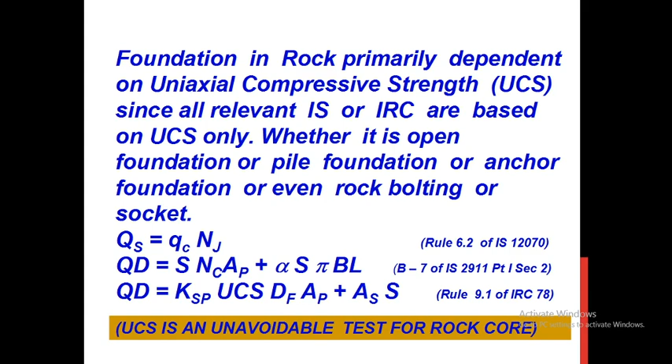So ultimately shear strength S or qc is directly UCS, and this S is a derivative of UCS. Normally it is half of the UCS value. It appears that the UCS value is the most important parameter in foundation analysis in case of rock bed.

However, we are not always getting an appropriate rock core. Appropriate rock core means, for UCS analysis, our test specimen requires a length of twice the diameter.

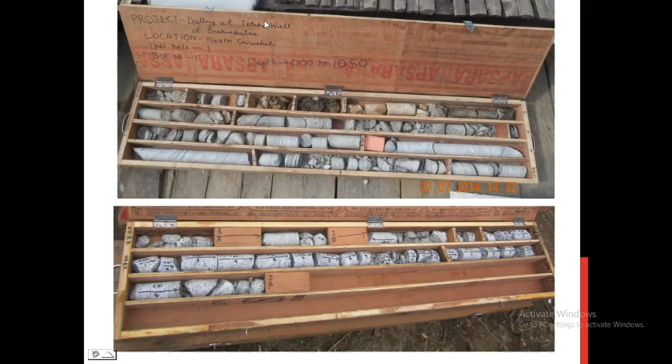Next, in this bore, this is also a 20 meter bore. Here 1 piece is there. Say we can go for 2 pieces here, and 1 piece here. We are getting 3 pieces only. That means in a 20 meter bore we can go for 1 set of UCS test.

People always suggest the larger the core diameter, the better for efficiency and purposeful results, but I do not agree. The hole size should be NX so that we can be within the framework of RQD and our UCS criteria fulfillment. Because if it is a 55 mm core, the required length is 11 cm, slightly more than the RQD requirement. So it is always better to go for NX core drilling for all practical purposes.

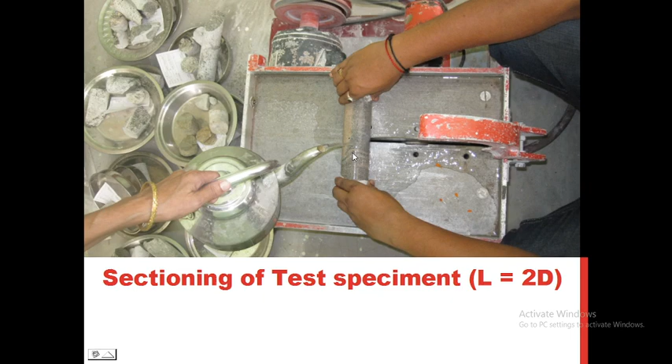You see, these NX size cores with sectioning of the test specimen. The test specimen is L equal to 2D. It should be specimen, not speciment; it was wrongly typed. Length equal to twice diameter. So it is required to be sectioned properly using a diamond core cutter. And next step, we have to polish it for a uniform level base. If it is non-uniform, strength will be misleading, so it should be polished properly.

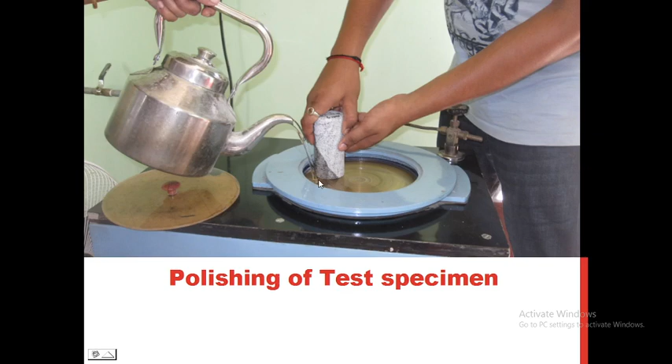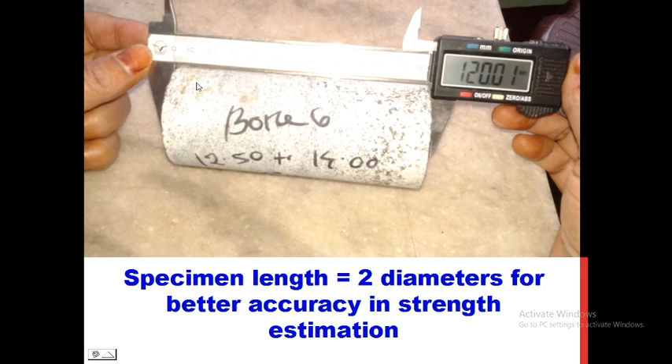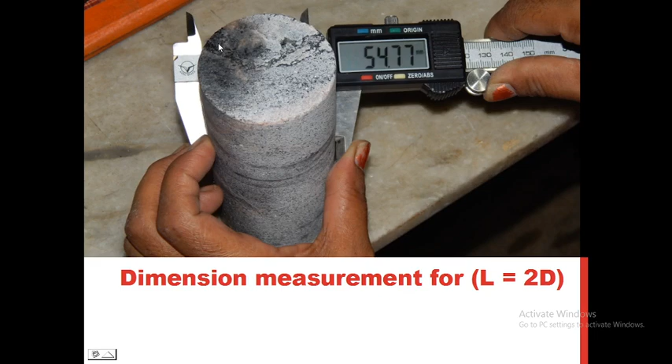Then after polishing, we should measure the length and diameter, because our requirement is 2D. It is 12 cm. Now after polishing, it should be almost 11 cm. A little bit here and a little bit here is removed during polishing, so it will come to 11 cm. Next you see, it is 54.77. Instead of 54.77, we are considering it as 55. New bits give a little less than 55 mm, and old bits give a little more than 55. The average is 55. It is NX size. So we are confirming the diameter is 55 mm and length is 11 cm.

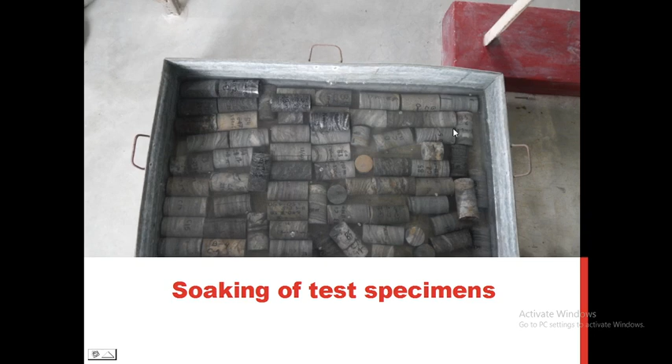Next step, the test specimen should be soaked in a water bath for 72 hours. There are two purposes. Number one, dust or dirt from the drilling operation, the cutting spoils, may remain inside some pores. To remove that, we have to soak underwater for 72 hours and later dry completely, as far as possible to zero moisture content, before analysis.

Though we are fixing dial gauges, as soon as it cracks, all the dial gauges are damaged. And arithmetically, we cannot calculate the actual failure diameter. Up to a very limited scope, say 0.1 millimeter or 0.01 millimeter, we can measure. After that, there is no scope at all. All of a sudden cracks develop, and we cannot measure the ultimate failure length, so we cannot arithmetically calculate the failure area. Therefore, it is considered as load per original area, the initial area. This is uniaxial compressive strength.

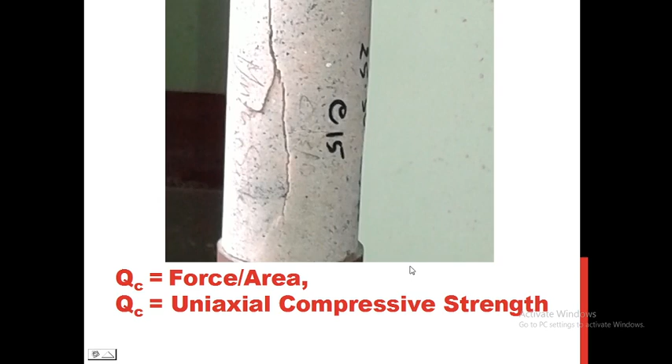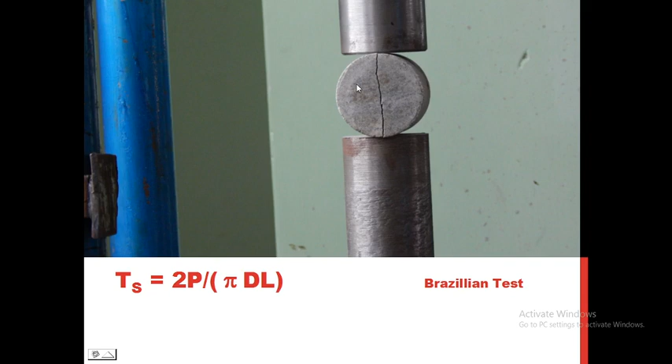In this method there is no restriction on diameter and length. Any diameter, any length, we can use as a test specimen. Here we are using L equal to D. D is 55 mm, L is 55 mm, and this is 2P, P being the applied load, divided by pi times diameter times L. So with this equation we can calculate the tensile strength using the Brazilian method.

Now another easy and most conventional test is specific gravity. In specific gravity you cannot use a big size of core, because the permeability of rock is so low that water cannot penetrate inside to ooze out the air from the voids. There are little amounts of voids there, but those voids cannot ooze out. With about a 55 mm diameter core, it will be very difficult to drain out that amount of voids using water.

So what is the general practice? To crush down the rock core into small pieces so that it can be saturated within a reasonable time. Normally 48 hours is sufficient. In some cases, the harder the rock, the more time it will require, but not more than 72 hours is required to drain out the pore water from the rock core. After that, specific gravity is the ratio of the weight of solid to the weight of an equal volume of water. It is Archimedes' principle. We determine the specific gravity from the equation.

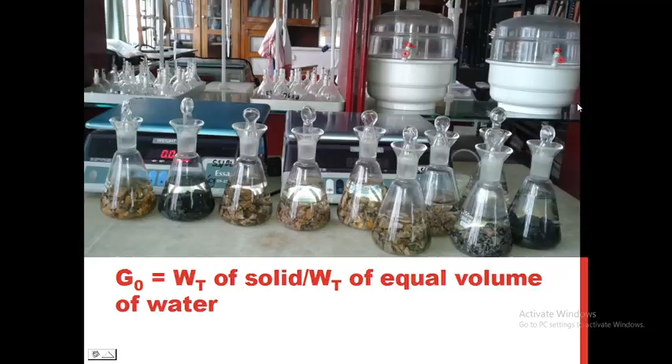We have conducted a comparative study based on several thousand laboratory test results: UCS, tensile strength, density, water absorption, void ratio, etc. From earlier records also, we have calculated about thousands of test results, and we conducted this study with Ms Pinki Gogoi and Ms Neekhat Begum, who were MTech students of Cotton University. They conducted this study, and we were successfully able to draw conclusions on approximate equivalence and relationships between UCS and other test parameters.

In this context, I am sincerely thankful to Ms Pinki and Ms Neekhat for their dedicated services, which may be useful for our next generation.

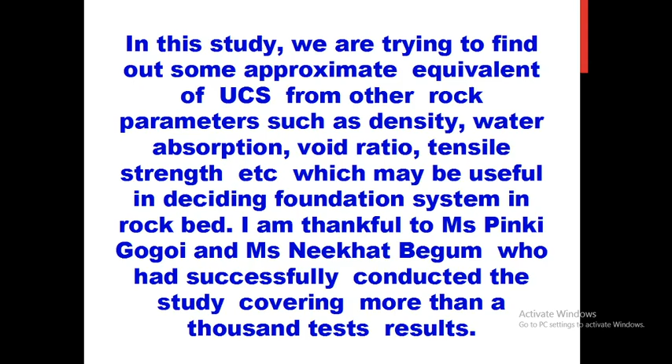You see, this is unconfined compressive strength versus tensile strength. UCS, unconfined compressive strength, versus tensile strength. The equation is tensile strength equals 0.089 UCS minus 1.465. With this equation, if we get the tensile strength, we can calculate UCS accordingly, and if we get the compressive strength, we can calculate the tensile strength.

This graph will be helpful for determining the engineering properties. When there are insufficient cores for UCS and only small cores are available, from small cores we can determine the tensile strength, and accordingly we can get the unconfined compressive strength also. With a rearrangement of this equation, we can go from tensile strength to UCS.

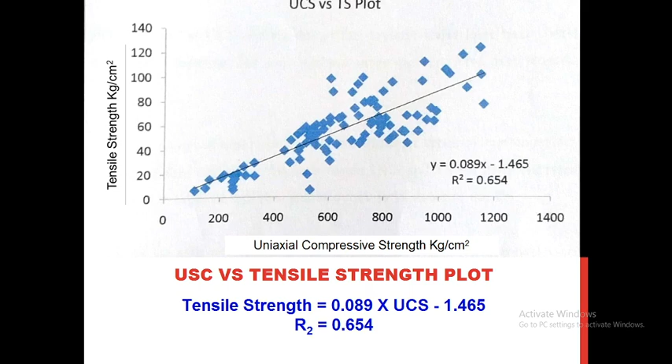See, this is specific gravity. Conducting specific gravity is very simple. This is the simplest test of rock mechanics. In rock engineering, the only simplest tests are density and specific gravity. So with the help of specific gravity, we can also determine the unconfined compressive strength, that is UCS, uniaxial compressive strength.

I have some mistakes because actually I belong to long back. In our days we used foot and inch. Now it is Newton and millimeter. So the old terms are still on my lips.

So, uniaxial compressive strength versus specific gravity. I am not saying that it is 100% accurate. It is 34% accurate, you can say 35% accurate. But at least we can go for specific gravity, a very simple method, and we can calculate the UCS from specific gravity more or less, purposefully. I am not saying that it is exact, but purposefully.

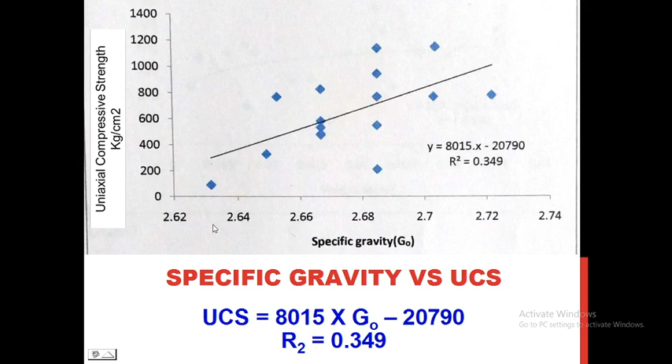I want to add here, in the same formation there are three pieces. We are required to conduct three tests for one set. In my whole career, I never got all three pieces giving the same results, with the same effort, same sincerity, same precision, using the same instrument. I have conducted several thousand tests on rock samples, yet never have three samples given the same value. There is some amount of error, whether human error or formation error. There may be many things beyond our expectation and beyond our capabilities. So, using specific gravity also, we can calculate the UCS values.

Now you see void ratio. Normally the void ratio of rock mass is hardly 0.01 to maximum 1% to maximum 3%, normal range. Normal, which we call sound rock, it is 0.1% to 3% void ratio, normal range. So from void ratio also we can calculate the UCS values. If it is not for design purpose, but for checking purpose, it is purposeful.

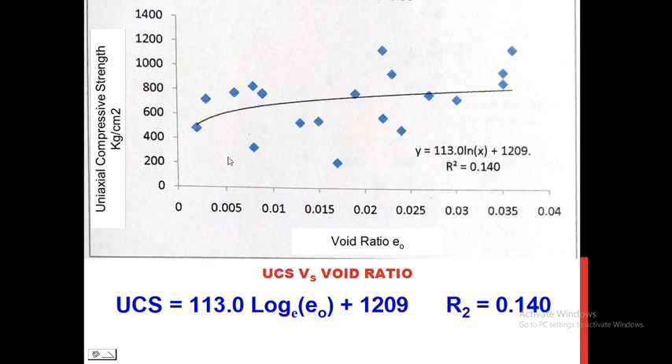The equation, the relationship, is 113 log e void ratio plus 1209. From this equation we can arrive at an approximate value of UCS. Dry density is the simplest test, like specific gravity is the simplest test. Make a section, polish it, weigh it, calculate. There is absolutely nothing. Take a specimen, polish it, measure the length and diameter, and take the weight. So from dry density also we can calculate the UCS.

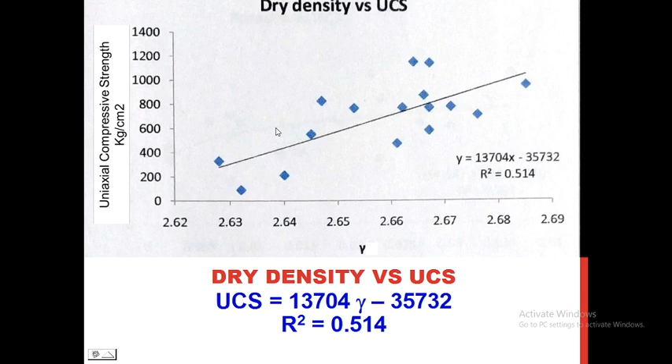The equation is 13704 gamma, where gamma is dry density, minus 35732, which is more than 50%, 51% correct. More the density, more the compressive strength. Less the density, less the compressive strength. So from this we can easily calculate the compressive strength from dry density also.

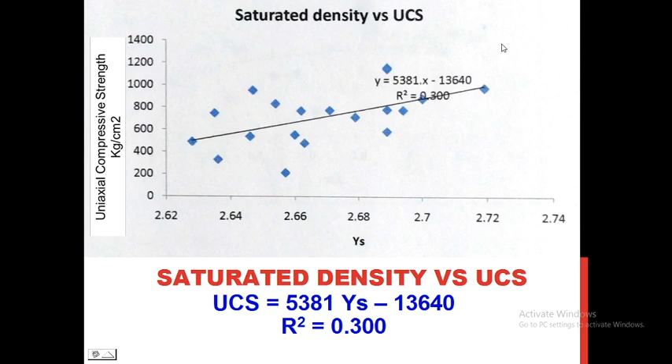Now the saturated density is a simple arithmetical calculation between specific gravity, void ratio and dry density. Saturated density is denoted as gamma S, and UCS equals 5381 gamma S minus 13640. It is almost 30% accurate, it may be 50% approximation or like that. All these are the simple methods I have explained so far. With these simple methods also, we can determine the UCS for our necessary purposes.

Another is water absorption. Water absorption is an arithmetic calculation. People say that for millions and millions of years this rock bed is under water, so what is this question of saturation? But water absorption is its capacity. Up to a certain limit it will absorb water; beyond that it will not absorb. Normally sound rock shall absorb maximum 1%, and soft rock slightly more. If it is more than 2%, the rock is soft or weathered rock.